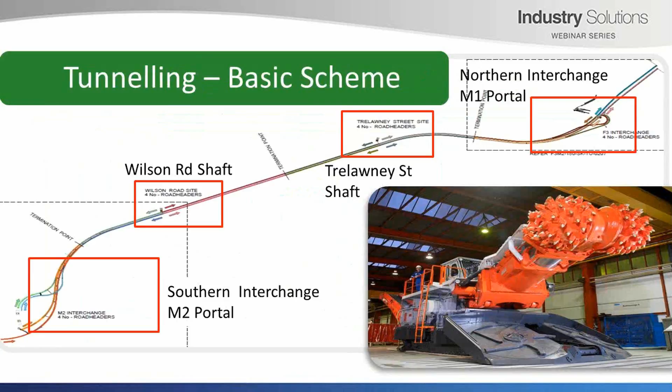A little bit of an idea of what the project's about: 16 kilometres of mainline tunnels, 4 kilometres of ramps, 75 cross passages, 19 road headers. That's the big one there. That's more than's ever been mobilised at one time on a project. So it's a big one. Our tunnelling, we've got generally 4 shaft areas. The shafts are sunk before we commence any tunnelling, and we're tunnelling using road headers.

We've got some milestones of the project. Roughly mid-2016 is when we commence tunnelling. The project's due to complete in late 2019, with all sorts of construction work to happen in between. So here are our challenges.

Some of the main challenges on this project is simply the fact it's a mega project. It's a large scale, and with that brings various program pressures. We also have problems associated with those: consistency of systems across the project, trying to standardise the skills with a diverse workforce and the methods, managing the large amount of data that surveying on this project brings, and also your typical interfaces with third parties. And one of the big ones is the availability of suitably qualified and trained personnel.

Early on we took the decision we were going to try and use a lean approach. We got forced into this, really. Automate as much as possible, and uncouple administrative process from production roles as much as possible. So we set about having a plan. We created an instrumentation and software plan, and we tried to structure our data where formerly there was unstructured data.

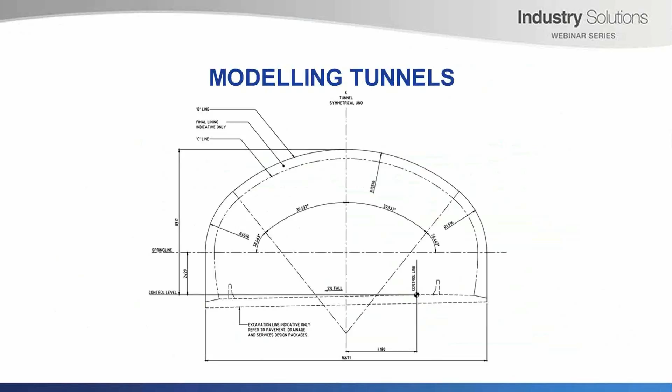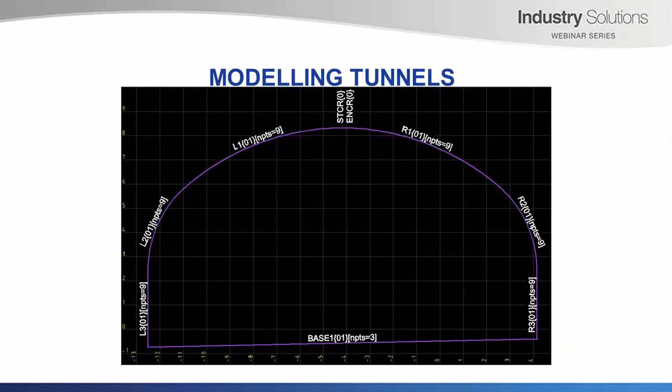So we start off with something that looks like this. This is the sort of drawing we get from our designers. Just a PDF, 2D, dumb PDF, with just the basic information. We then have to draw this in 12D, and so we draw this in plan view. And we give it certain naming, so 12D can interpret all the various segments. This is just a superstring, and build its snippet. We then pass this string into this snippets from profiles panel. You can see there you give it the profile and a snippet, and it creates it.

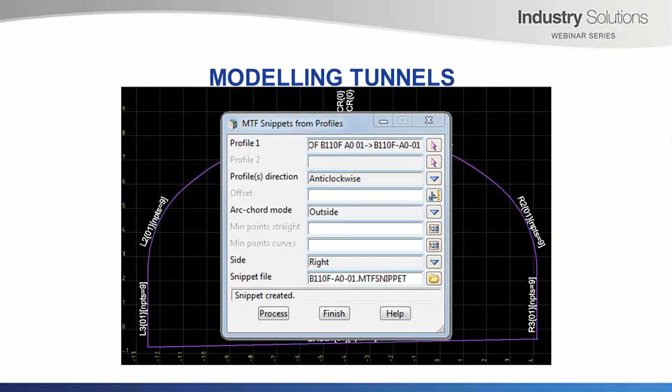Here's a screenshot of the snippet for anyone who's interested. You can see it's just a lot of links. So for a typical tunnel profile, you could have 50 to 100 links around the profile. So we are using mostly standard MTF commands. It's not that hard. One of the important parts is stretching heights, so we get a true perpendicular to the control line tunnel. We're also able to use layers, and we can use various layers for rock, various layers of shotcrete or structural support, benching, structures, and so on.

And using the MTF allows us to also modify the tunnel without creating additional profiles, just using your standard modifier commands. So for example, things like jet fans, egress or cross passages, and the tricky areas like junctions. So here's a screenshot just of a typical MTF for this project. There's only really 3 steps to modelling a tunnel: snippet, stretch heights, create your shape. It's really that simple, just repeat it over and over.

So with the shapes, we're using some of the new features. We can have varying lengths. So what this means is that you can have your profiles change. So long as your start and end link are constant and always present, the number of links in between those can disappear, reappear, and 12D will do some smart, intelligent stitching and transitioning, so it'll stitch it together all nicely. We've also got a simpler syntax, so rather than having to type in 100 links when you're creating a shape, there's a bit of a shorthand there that just makes it a bit quicker.

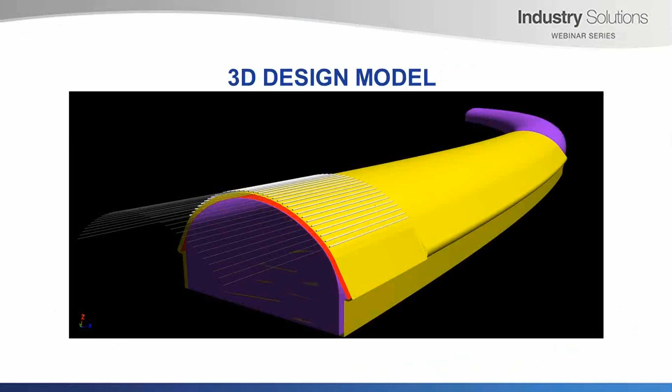So here's just some screenshots I'll go through showing things we've modelled already. So this one shows the various layers, yellow, red, purple, of various layers of our tunnel, and the white tubes around the top are actually structural supports and canopy tubes. This next one is, I guess, showing a bit more, showing some of our overlapping tunnels and varying changes in profile, and also modelling the shafts and all the structural support there.

And the good thing is, this is not just pretty pictures. Pretty pictures is just one of the outputs of it. But all of this can be used directly in the field. So users can directly set out every bit of information you see on screen there.

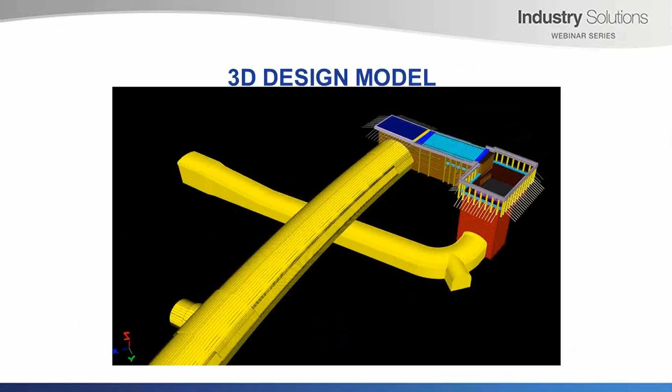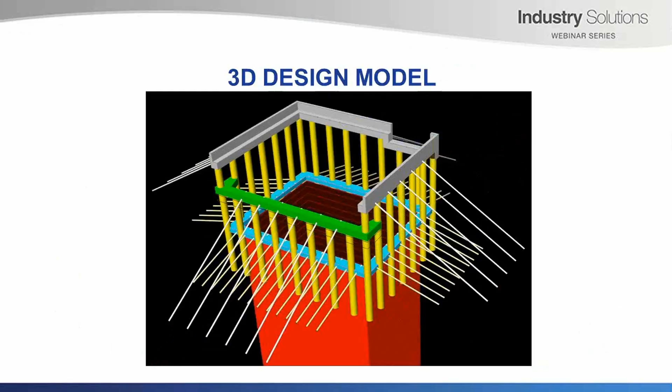So again, here's just a close-up of a typical shaft with lots of piles, capping beams, and rock bolts and anchors. That's all fairly standard things, just 3D strings in 12D.

So how do we manage the model? All our control alignments, everything's dependent on control alignments. So we make sure they're versioned, so we can tell how things have been set out and whether people are using out-of-date information, and we also verify the geometry. We do this using our custom reports, and we put this into a spreadsheet that just highlights any discrepancies between our design and the design we get from our designers.

Okay, tunnel definitions as well. So new in version 12, we can now attach tunnel definitions directly to the center line. Previously they had to be separate files. That just became too much to manage. So now we can set these, and these are just stored as attributes on the control line.

We also have a central data model, which we'll go through in a bit more detail later on. It's centralized, restricted, version controlled with 12D Synergy, and we actually automatically push this out to surveyors.

So, what are some of the successes we've had through using 12D? We can quickly and easily model tunnels. The use of MTFs and snippets allows us to produce a very flexible 3D model very quickly. The versatility of tri-meshes also means we can model a lot of different objects. We can use them for tunnels, for structural elements, for roads, for pavements, for pretty much anything we want on our project.

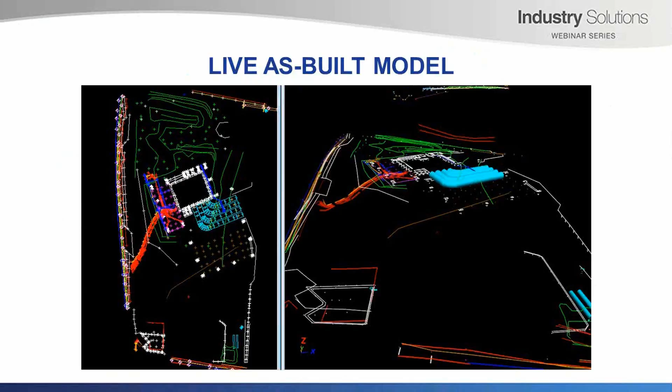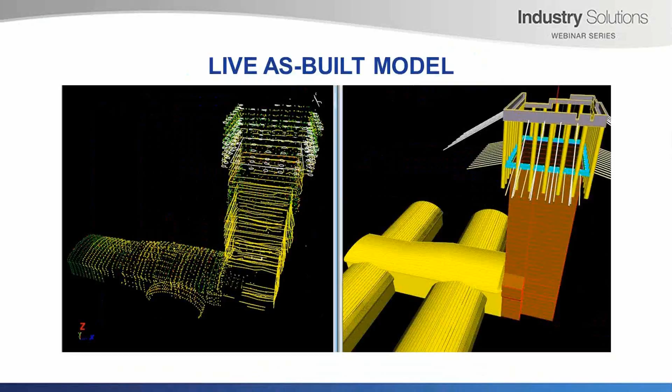So I'll just show some screenshots. These are taken directly from our live as-built model, so these are directly from our central data models. Okay, so these just grow over time as users submit fieldwork, and also we approve it and import it into our central data model. Okay, here's a nice one showing our as-built model on the left, so what's actually been built and picked up, versus our design model on the right. So you can see that they're pretty much spot on as you'd hope and expect, and we can actually do various reports and conformance checks on those.

So what are some of the successes we've had? We get automated data submission. We can do collection of data, and it doesn't matter whether they're offline or online, which is a big improvement on this project. Importantly, by automating some of these processes, we get structured data. So all data from anyone on this project is the same, and it's usable. Okay, we don't spend hours massaging or editing. It's immediately usable.

Okay, and importantly, when we feed this back through our central data model and back out to our field surveyors, all the survey staff are using the same base data. We don't have to worry about someone using out-of-date information. We can see that it's all up to date with Synergy. Okay? The data is current, controlled, and live. It's a dynamic model. We're not building this at the end of the project, just when we have to. We're building it as we go along. I'll now hand over to Dave, who will talk about some of the interfaces and outputs we'll have.

Okay, thanks, Matt. All right, so a few more challenges for us. This data of which we speak, it's relied upon by others, other functional areas, including other areas within our survey department, if you like. Guidance and machine control is a very big one. Monitoring, deformation monitoring, and the collection of data as an input for this is a big one. Utilities, geotechs, these are all forms of data that's relied upon by others. Another challenge is to be able to produce and use reports at the work front.

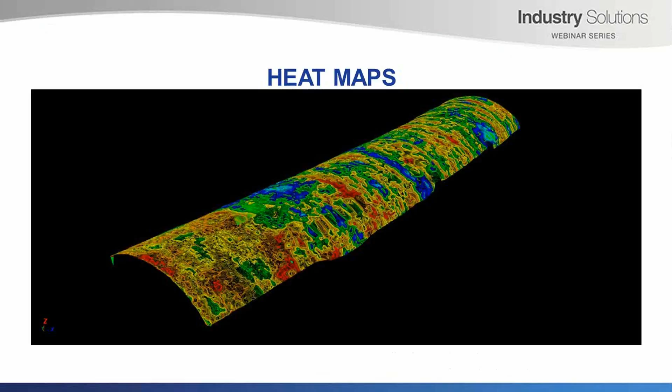Now, there's various criteria that you can apply in terms of thicknesses, and colours or whatever you like. It's fully customizable. And of course, once you've rewrapped it into 3D space, you can then actually set this information out. So you can trace it with your instrument laser on site in the tunnel and show your operator where they actually need to excavate. So it's a very powerful tool. We're only really scratching the surface with this one, but hoping to use it a lot more.

Okay, so the successes that we've been able to manage through the use of 12D software: we've automated outputs to others, for instance, guidance and monitoring, and eliminated as much as possible double handling of data. This is wasted time. We're able to make better, more informed engineering decisions in the field, and of course, less time in the office.

Okay, so now I'll just talk about some of the conclusions and some of the benefits of our partnership with 12D. So we have been able to develop what we consider industry-leading systems. These are not things that were typically done in the past. Even on tunnel projects, I think these are new, innovative solutions. We've been able to provide an integrated solution, with 12D Model and 12D Synergy working so well together. But at the same time, it's also flexible and customizable. None of this would have been possible without being able to write our own macros, customize the interface, customize reporting and plots to the extent that we can with 12D Model and 12D Synergy.